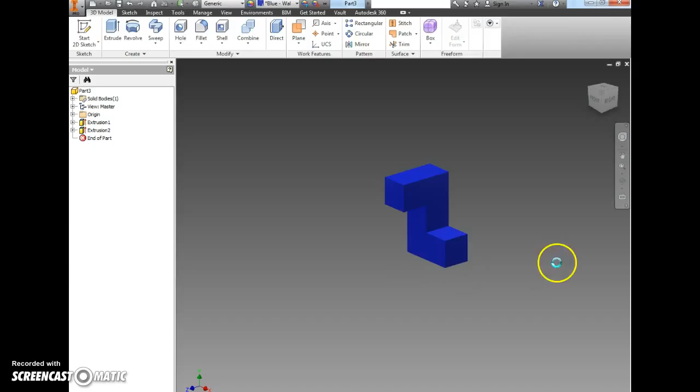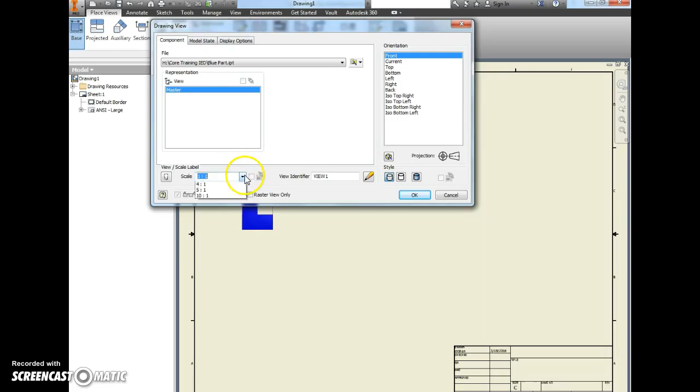So we click on Base. And the first thing you do is go into your little search menu and you pick out one of your pieces, click on your part, and click Open. It's going to pop up just like this. If it's too small, you can always change your scale over here, but 1:1 should be fine.

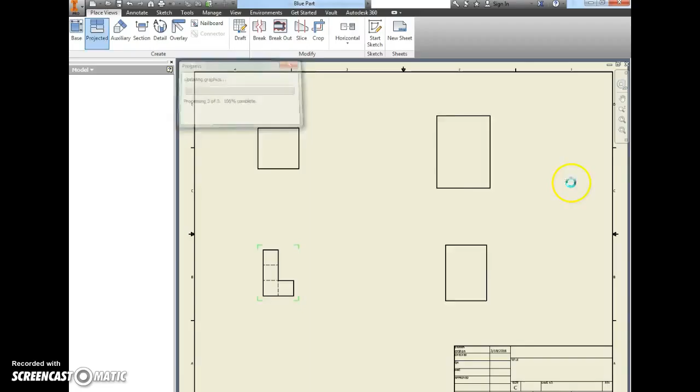So click here, you're going to click straight up. It's going to make a box, so don't let that stress you out. Click over here to the right and then down to the bottom until it switches. Now you have 3 boxes. They don't look like it's supposed to, but that's okay because you're going to right click and create. So this is what our multi-view should look like.

Now, when we're doing multi-views, we have to do what we call dimensioning, and we have dimensioning rules we have to follow. So when we dimension, we're going to go under Annotate and Dimension. The first thing we should do is always do the overall dimension.

That's our width. Remember we talked about that when we did multi-views before. This is also our width. Now we dimension, I now know the overall width here and another width here. There are no other widths that I need to measure, so I shouldn't go up here and try to do this.

This is what we call a double dimension. Double dimensions are not good. We don't want to overly dimension our stuff. This would be a very, very poorly dimensioned piece, so you don't want to do this, okay?

Now, if you do happen to do that, and I do want you guys to check each other's work, go back and say, okay, listen, we have too many, this is width, this is width, this is the exact same measurement, I don't need both of these. So I can right click and delete the ones I don't need. It's an easy fix if you mess up.

Then we want to do your overall height. So if I'm doing my overall height, I'm going to go from here to here. I can either do it on the right picture or on the left picture. I just don't like to cross dimension lines, so I'm going to do mine on the left or on the right.

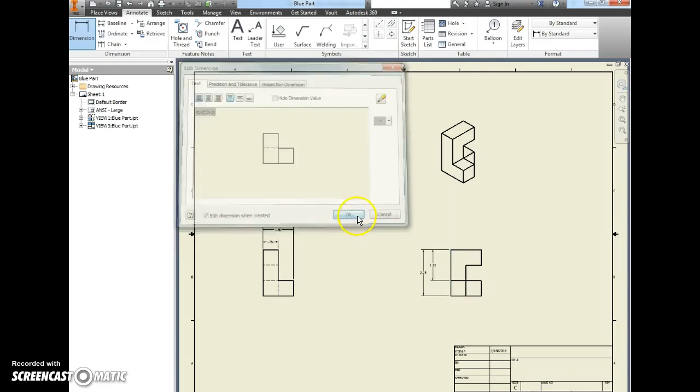I'm also going to measure from here to here because that's also a height. Then I measure from here to here, and that'll give you my measurement there. So this is how it should look.

Usually you want to keep your dimensions between your pictures. If I did that, I'd have to go through my object. That's one of the rules we try to avoid - we try not to dimension through our object if we can. Sometimes you can't help it.

The other thing we want to do again is we don't want to over dimension. So if I know this dimension, I don't need this dimension because I can subtract and get that dimension. Same thing over here, we have hidden lines - we want to always avoid dimensioning the hidden lines. So now I've got my width, now I've got my height.

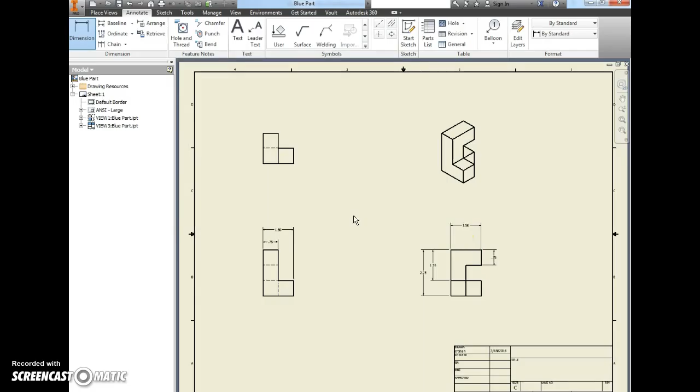The next thing I need to get is my depth. So to get my depth, I'm going to go from left to right. There's my depth for this piece. And then the next part is here to here for this piece. Oops, double dimension again?

All right, there should always be a little gap in here. And I dimensioned it up here this time just because it's a little cleaner. Because again, if I had a dimension down here, I'd either have to go below and not between my 2 objects, or I'd have to go through my object, and I want to try to avoid both of those things.

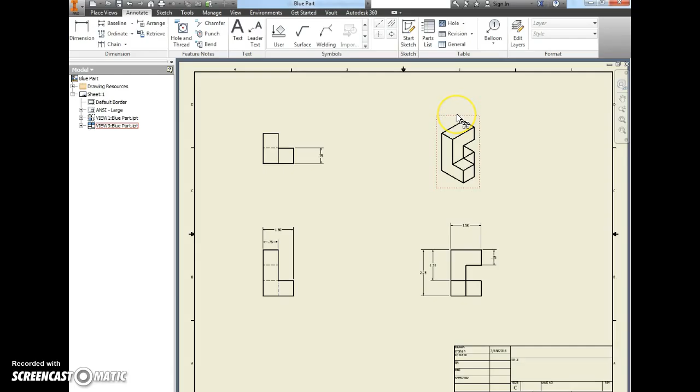The last thing I would do with these projects is go in here and highlight my object, and I want that to be colored so I can see which color it is. I'm going to click on Edit View, and see this little colored shaded piece here? I'm going to click on it and click OK, and then it colors your piece for you. So this would be a fully dimensioned multi-view piece.

And the only other thing I tell you guys to do is in your text box, go over here, and we can put a little title over here. This is your blue part.